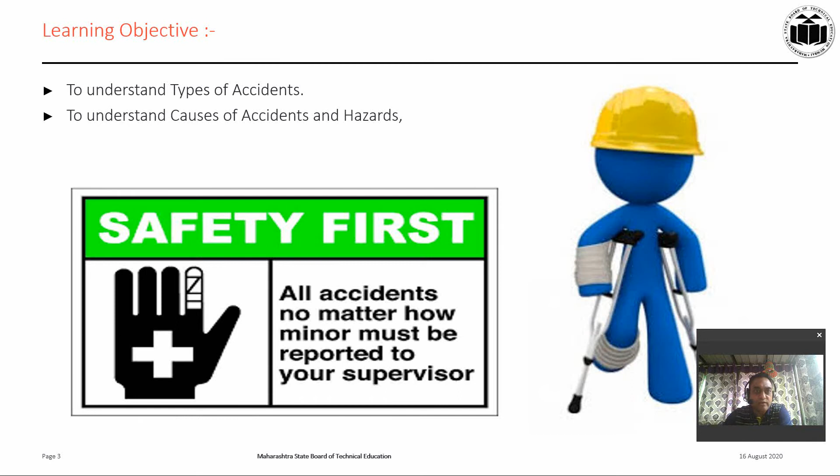The purpose of my presentation today is to understand a very interesting learning outcome, that is, explain the causes of accidents in a given situation. So let's start by looking at the learning objectives: to understand types of accidents, to understand causes of accidents and hazards. Then we discuss the case studies. In these, we suggest the causes of accidents for a situation.

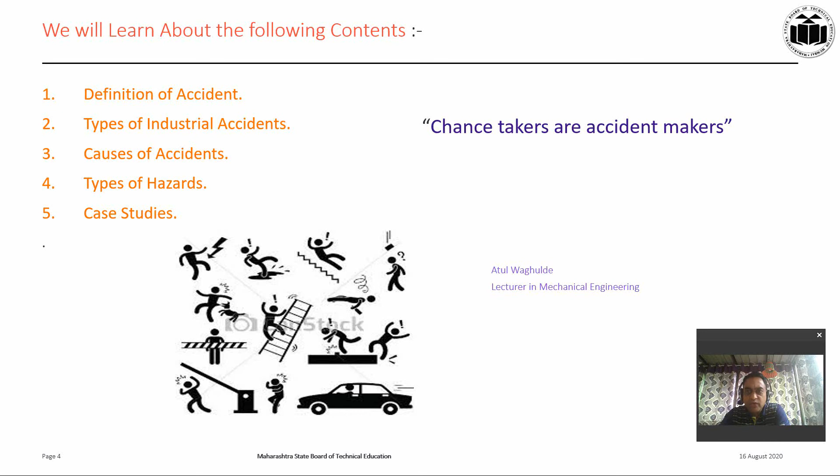So on successful completion of this presentation, you will gain knowledge and understanding of the following contents. Just look at the contents. Also look at the safety slogan written over here, that is, chance takers are accident makers. So always follow the safety rules and regulations.

So let us start with what we mean by an accident. An accident is an unplanned and undesired event which results in unacceptable and undesired consequences. The consequence might be injury and/or damage to equipment, machinery, raw material or finished product, or damage to the environment and loss of property, material or human. The second definition is: an accident is an unfortunate and sudden mishappening which causes damage or loss of property, material or human.

So what are the losses due to accidents? First is the direct loss. Direct loss is in terms of money. The employer has to pay the workers for compensation or medical expenses. Indirect losses are loss of time of the injured person and also of his fellow workers who stop the work, loss of time of supervisors, loss due to damage caused to machinery, loss due to reduction in the efficiency of the worker, losses to the injured worker due to loss of his income, medical expenditure, and pain felt by the worker which cannot be compensated.

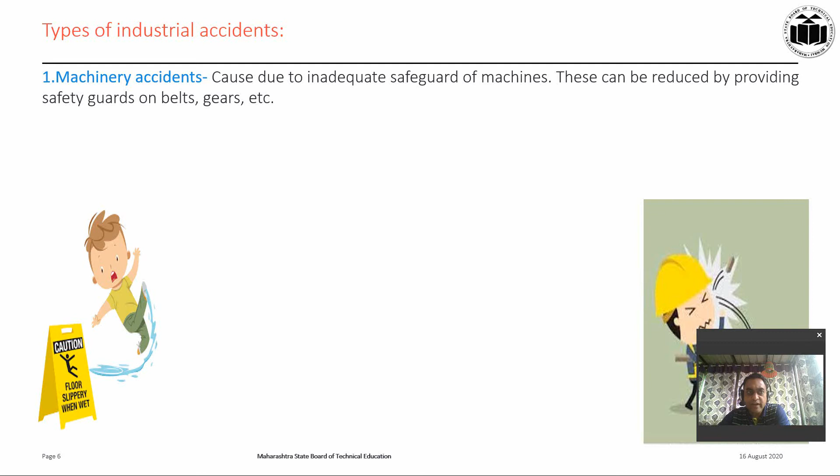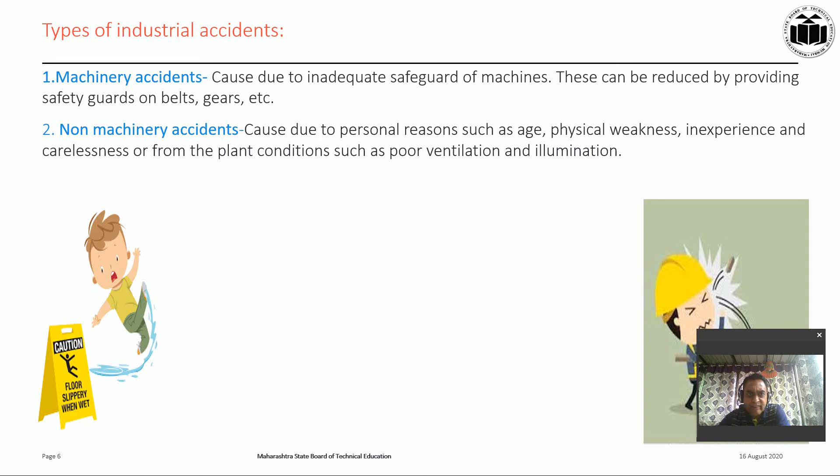Then what are the types of industrial accidents? The first is the machinery accident, caused due to inadequate safeguarding of machines. This can be reduced by providing safety guards on belts, gears, etc. The second is non-machinery accidents. These are caused due to personal reasons such as age, physical weakness, inexperience and carelessness, or from plant conditions such as poor ventilation and illumination.

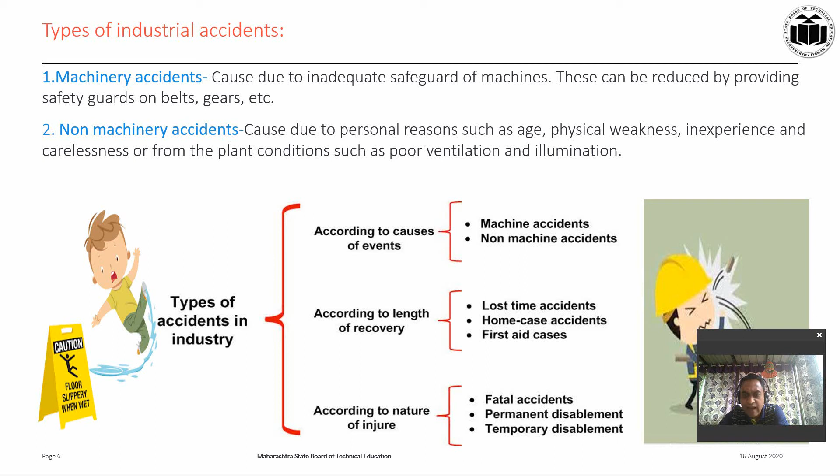Also observe the different types of accidents in industries. We discuss them according to the causes of events, then according to the length of recovery, that is, lost time accidents, home case accidents, first aid cases, and according to the nature of injury, that is, fatal accidents, permanent disablement and temporary disablement. In the next slide we will discuss them in detail.

So now, based on severity, durability and degree of injury. These are the minor accidents. Minor accidents means preventing employees from working for a period of less than 48 hours. Reportable accidents means preventing the worker from working for a period of 48 hours after injury. Then fatal accidents means it results in the death of an employee. So you must report it to management, legal bodies and police also.

Then accidents due to dangerous occurrences, such as explosion, fire and leakages. Man and property both can be damaged from it. Then internal accidents, meaning injury without showing external signs; a fractured bone is an example of an internal accident. Then external accident means injury with external signs. You can observe external types of accidents by their external signs.

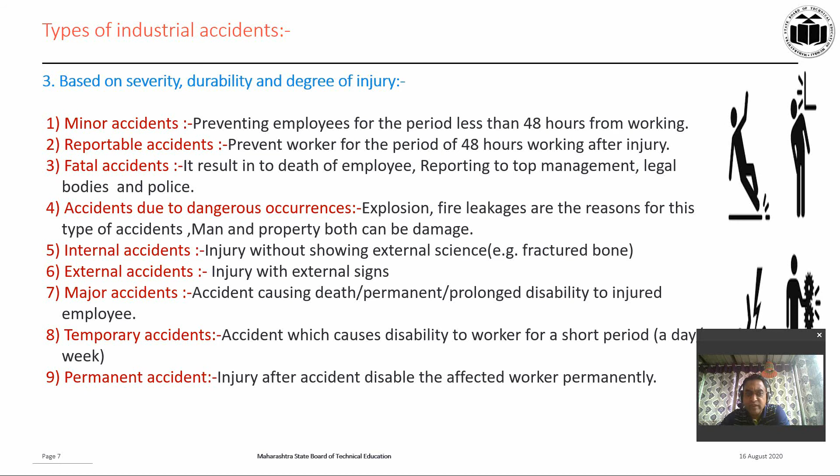Then major accidents: accidents causing death or permanent and prolonged disability to the injured employee. Then temporary accidents: accidents which cause disability to the worker for a short period of time, maybe a day or a week. Then permanent accident means the injury after the accident disables the affected worker permanently.

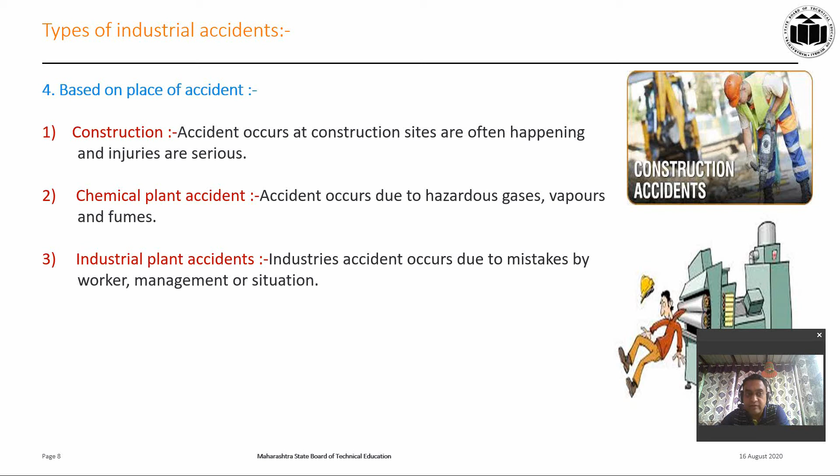Then the industrial plant accident. Industrial accidents occur due to mistakes by workers, management, or situation. Then the mining accident. Mining accidents mean collapse of soil layer, suffocation, and poisonous gases.

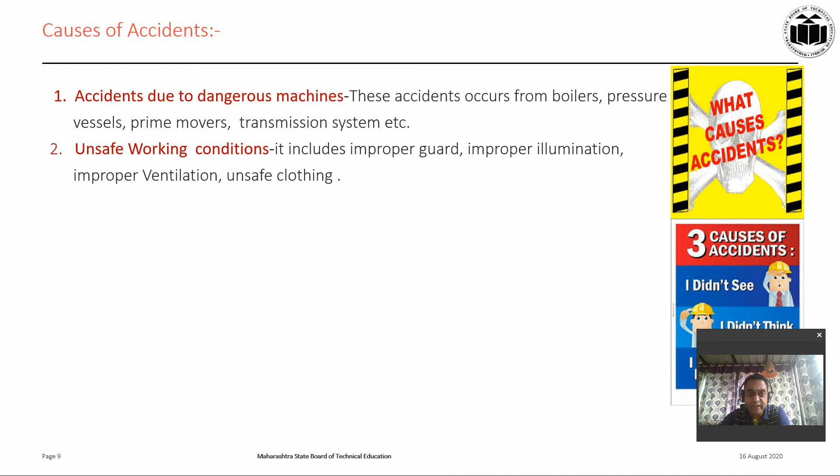Then we just look at the different causes of accidents. Accidents due to dangerous machines: these accidents occur from the big boilers, the big pressure vessels, the prime movers, the transmission system, etc. Then unsafe working conditions, which include improper guarding, improper illumination, improper ventilation, and unsafe clothing.

Then the moving objects: moving objects or foreign objects cause accidents. Suppose you are working on the lathe machine, then the hot chips can hit your body. So these are nothing but foreign objects causing accidents. The personal factor: lack of knowledge and physical weaknesses are the personal factors which cause accidents.

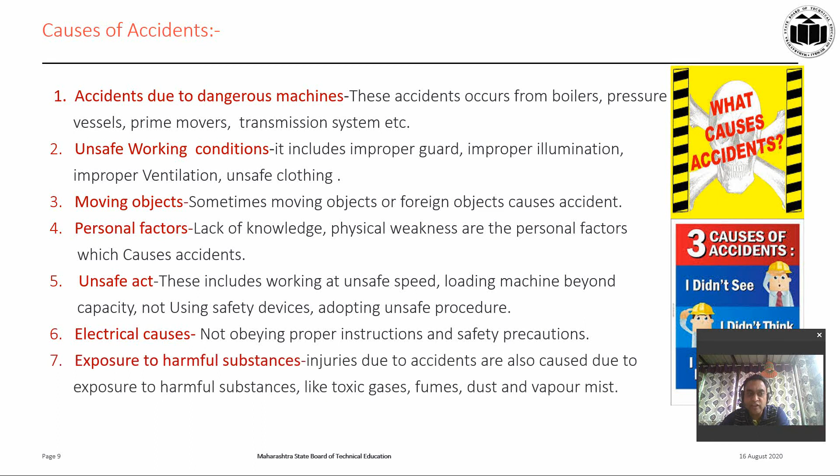Then the unsafe act is nothing but working at unsafe speed, loading a machine beyond capacity, not using safety devices, adopting unsafe procedures. Then the electrical causes: by not obeying proper instructions and safety precautions, these electrical causes happen. Then exposure to harmful substances: injuries are also caused due to exposure to harmful substances like toxic gases, fumes, dust, and vapor mist.

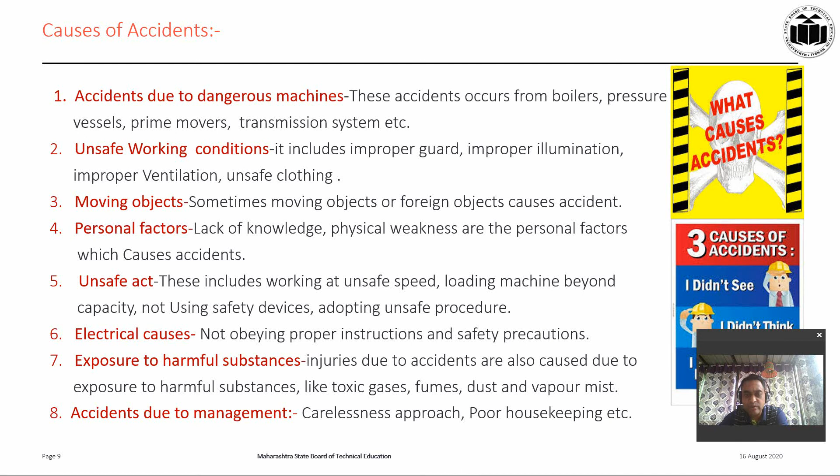Last but not least are the accidents due to poor management, that is the careless approach and poor housekeeping, etc. Now we discuss the different types of hazard. So first, what do you mean by hazard? Hazard is a situation to cause harm in terms of human injury or ill health, damage to property or environment, or both. So what are the types of hazard?

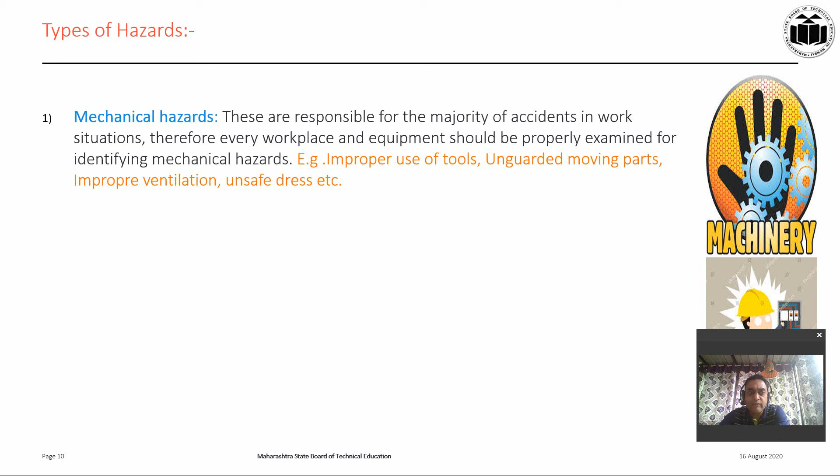The first is the mechanical hazard. They are responsible for the majority of the accidents in work situations. Therefore, every workplace and equipment should be properly examined for identifying the mechanical hazards. So what are the mechanical hazards? Improper use of tools, unguarded moving parts, improper ventilation, unsafe dress, etc.

Then the next is the electrical hazards. These may be due to contact of the body with wire, cable, rail, and other electrical appliances. The immediate effect of this is a shock which may be mild or severe enough to cause death depending upon the strength of the current. Then what are the types and causes of electrical hazards?

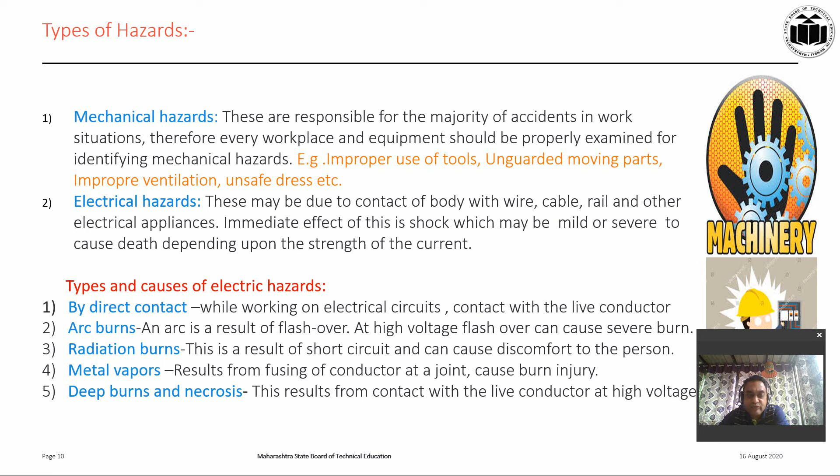First is direct contact while working on an electrical circuit, contact with the live conductor. Then arc burns: an arc is a result of flashover, and at high voltage flashover can cause severe burns. Then radiation burns, which are a result of short circuit and can cause discomfort to the person. Metal vapors resulting from fusing of a conductor at a joint can cause burn injury, and deep burns result from contact with live conductors at high voltage.

Then the next is the chemical hazards. A chemical hazard is caused by exposure to chemicals in the workplace. It can cause acute or long-term detrimental health effects and health risks. There are many types of hazardous chemicals including neurotoxins, immune agents, dermatologic agents, carcinogens, reproductive toxins, systemic toxins, and sensitizers.

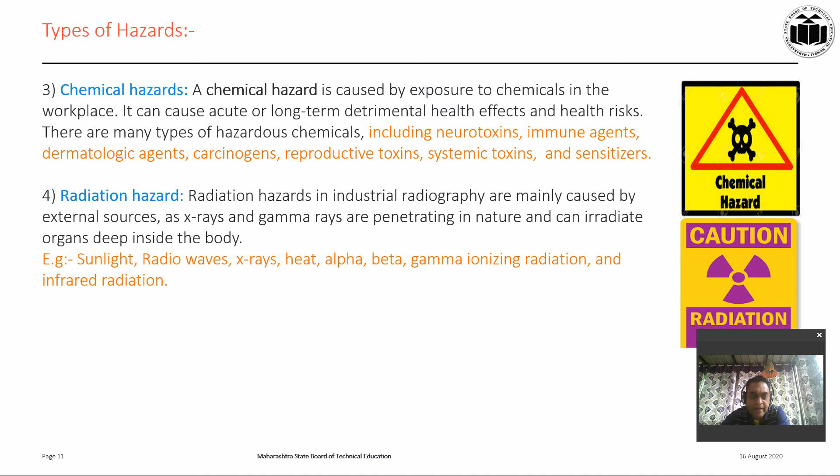Then the radiation hazards. Radiation hazards in industrial radiography are mainly caused by external sources such as X-rays and gamma rays, which are penetrating in nature and can irradiate organs deep inside the body. So what are examples of these? Sunlight, radio waves, X-rays, heat, alpha, beta, gamma, ionizing radiation and infrared radiation.

Then the last is the fire hazard. Fire hazard is the most common hazard, present in all areas of life. Fire hazards are workplace hazards that involve the presence of flame or the risk of an uncontrolled fire. Fire hazards include live flame, sparks, hot objects, flammable chemicals, and chemicals that can aggravate a fire.

So I have prepared these very explanatory slides so that you can easily understand the various types of accidents, the causes of accidents and the types of hazards. Then we take one case study of the Vizag gas leak.

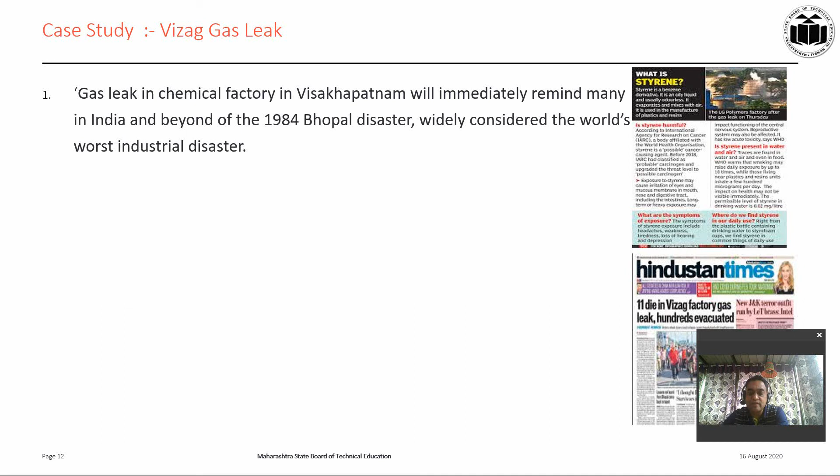A gas leak in a chemical factory in Visakhapatnam will immediately remind many in India and beyond of the 1984 Bhopal disaster, widely considered the world's worst industrial disaster. So, the LG Polymers plant gas leak in Visakhapatnam. Investigators probed the leak of styrene from the LG Polymers plant on May 7, 2020. The accident occurred as the plant's cooling system was clogged.

Actually, the leak was from one of two chemical tanks that had been left unattended since March 2020 due to the COVID-19 lockdown. The malfunctioning of the tank's refrigerating unit led to an increase in temperature, causing the liquid chemical, styrene, to evaporate. A total of 12 people were killed and around 800 hospitalized as a result of the gas leak.

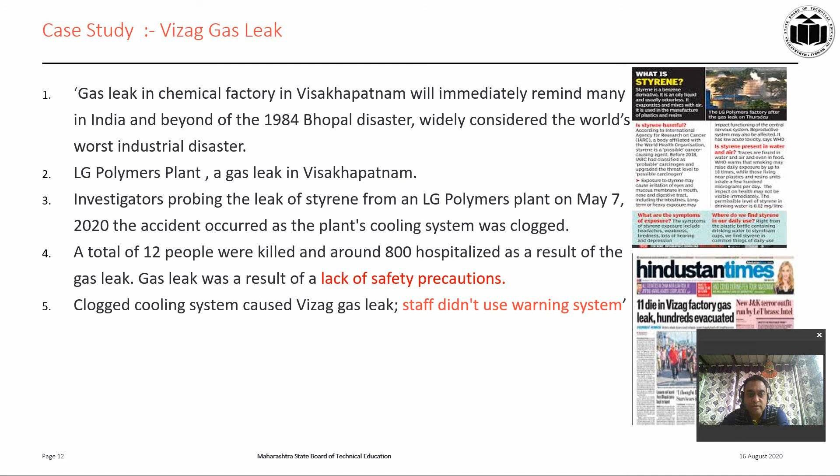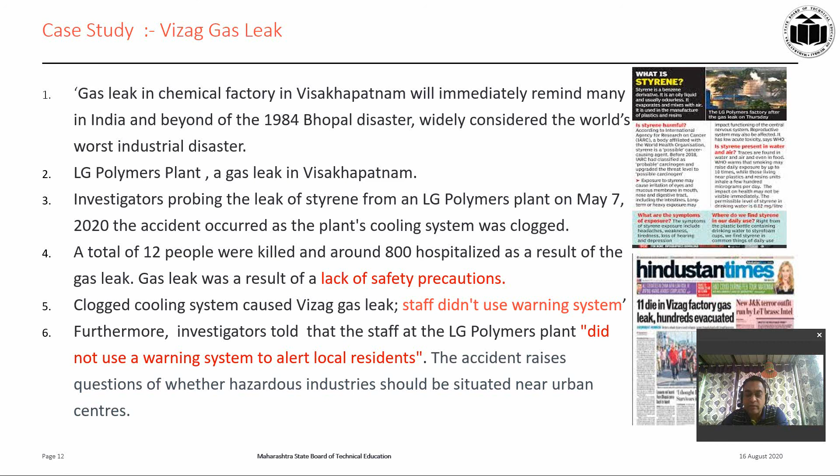The gas leak was a result of the lack of safety precautions. The clogged cooling system caused the gas leak. Staff did not use a warning system. Furthermore, investigators said that the staff at the LG Polymers plant did not use the warning system to alert local residents. The accident raises questions of whether hazardous industries should be situated near urban centers or not. So this is again a lack of safety precautions.

So from these accidents, what precautions should be taken to reduce such accidents? Check your gas equipment regularly, install a fire alarm system, have your gas lines monitored, and check your gas safety documents. If you detect a gas leak, turn off the gas supply, do not smoke, open the windows and shut off your electrical devices. So these are certain precautions to reduce such accidents.

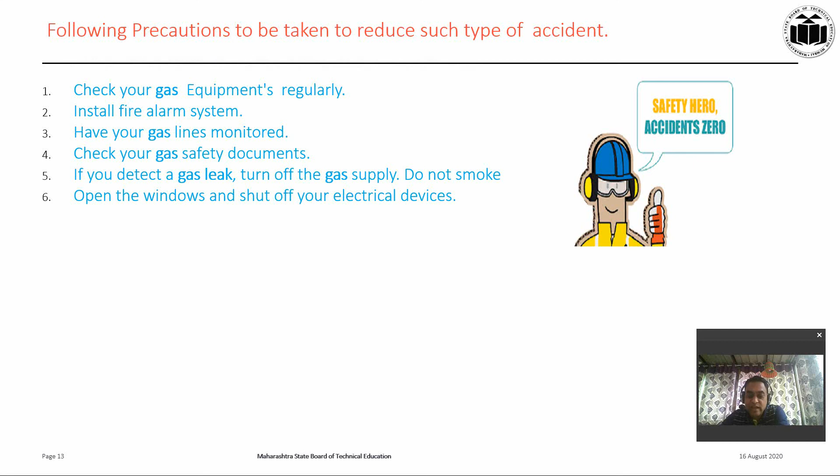Then the second is a case study of plastic and chemical industries. Generally in plastic companies, accident rates between 2004 and 2015 show that three main areas of safety contributed to the highest rates of injury to workers. First is machine safety. About 14% of all reportable accidents happened as a result of contacting moving machinery. Machine safety resulted in the largest number of enforcement notices served to plastic companies.

How can we reduce such accidents? We can ensure the presence of safeguards for machines or their moving parts, mark danger zones near machines, and inspect the emergency stop device of the machine. The second is slips and trips. About 19% of accidents in plastic companies during the same period were caused by trips or slips in the workplace. Then work at height. Nearly 12% of workers were injured as a result of falls from height in the workplace.

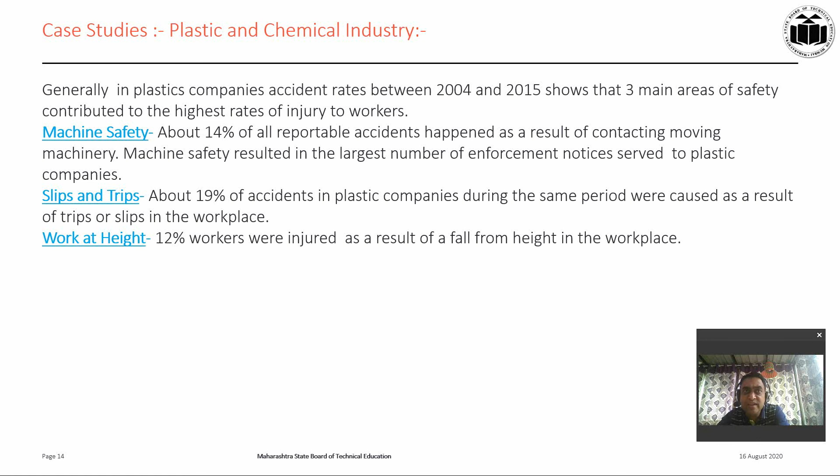So how can we reduce it? You must inspect how loose objects have been secured. Use the proper type of ladder in proper condition. Check the placement of the ladder to avoid such accidents. According to the Bureau of Labor Statistics in 2019, industrial accidents affected more than 1.2 million workers in the United States.

They point out four main causes of accidents in chemical plants. First is human error, that is the carelessness of human beings; improper training, not giving attention to training; manufacturing defects, as we discussed; and improper maintenance. These are the main causes of accidents.

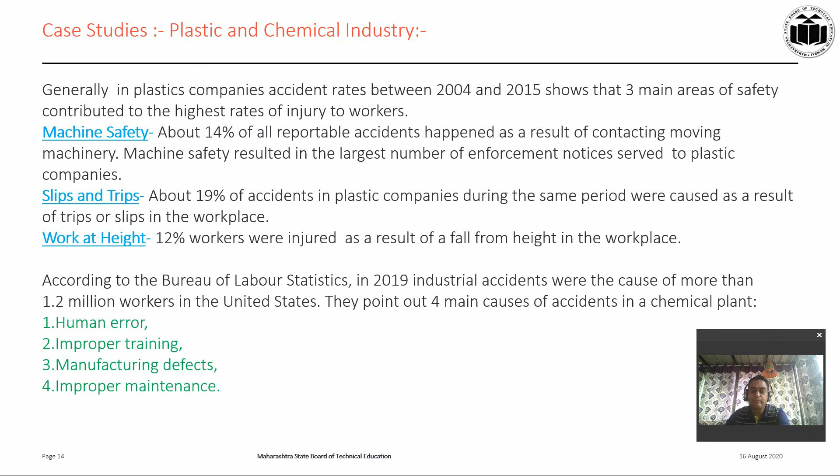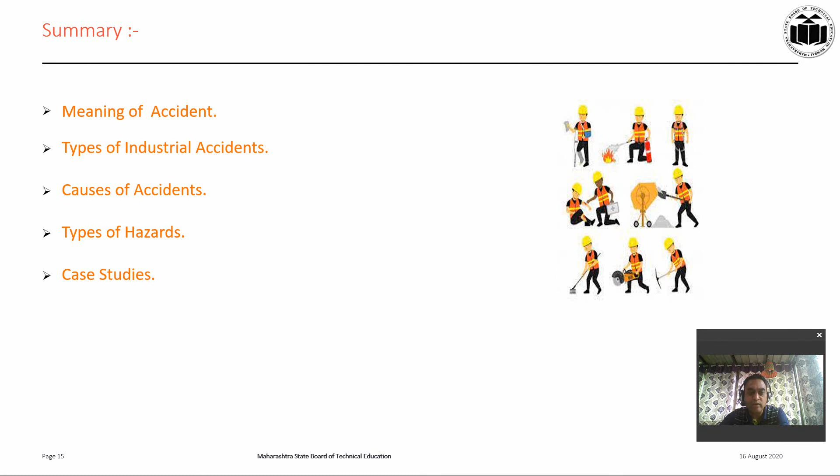So I hope that from these slides you understand the meaning of accidents, the types of industrial accidents, causes of accidents, the types of hazards, and from this case study the main causes of accidents and how to prevent them. So I hope that from these slides you understand these concepts.